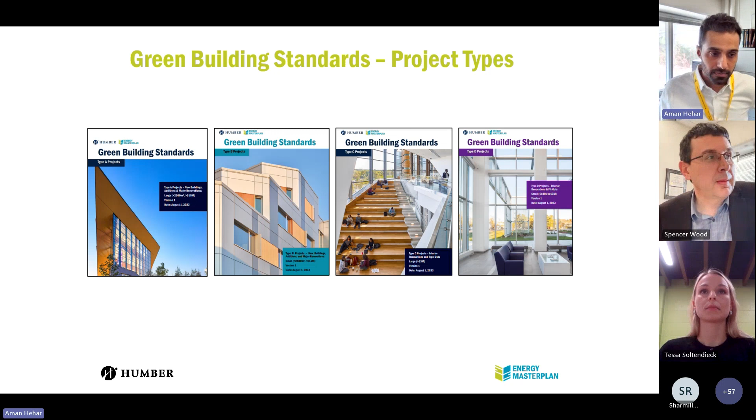Yeah, so I'll just give a quick overview. So the standards are divided up into 4 distinct documents. You can see the cover pages here on the slide. And each is for a different type of project. So we've got 4 project types. Like I said, the type A's are the new builds, additions, and major renovations, but the large ones, right? Bigger than typically 2,500 square meters, 15 million dollars.

Type B, same type of buildings or projects, new builds, additions, and major renovations, but much smaller. With type C, we're getting into the interior renovations and fit outs. But typically these would be the larger ones, over 3 million in capital budget. And then type D are our simplest projects, again, interior renovations and fit outs, but typically between 100K and $3 million.

As you might imagine, the green building requirements are the most onerous for the type A projects. These are our biggest projects. They have the longest schedules, largest budgets. So there's an opportunity to be more sophisticated in our requirements there. And if we contrast that with the type D, for example, here the green building requirements are very limited, right? But in our minds, that's okay, because these projects also have the smallest impact in the grand scheme of things.

Yeah, I'll pass it back over to you, Tessa, for the next question. Yeah, sure. So we've had a lot of interest in the green building standards for new builds specifically. Can you do a deeper dive into type A projects?

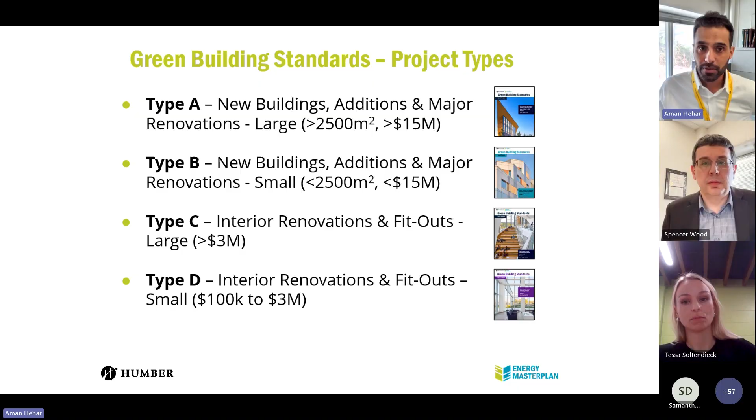Yeah, of course. I'm just gonna stop sharing the slide here and share my screen. So bear with me for a second. Can you see my screen? Yeah. Great. Okay.

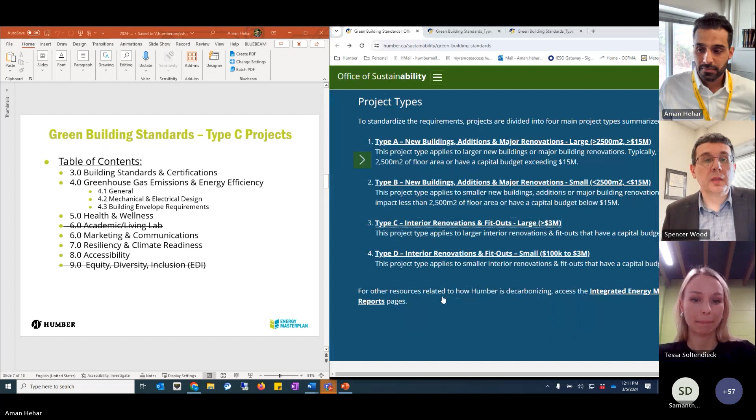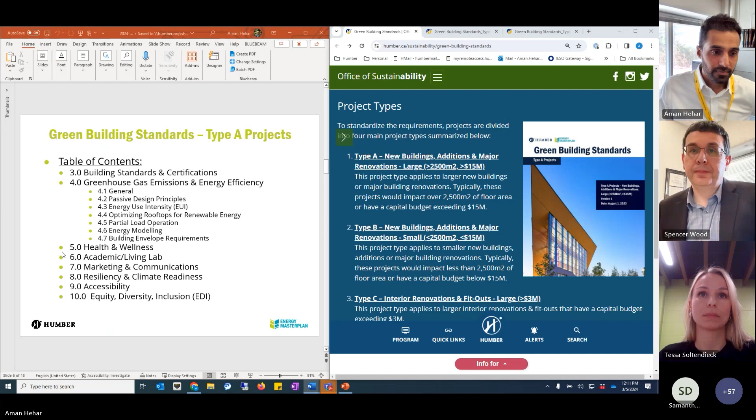So, I understand why there's so much interest in the type A. These are the biggest projects, biggest impact. I'll try to do a bit of a deeper dive into the type A's. The standard is quite long, and there's a lot of detail in there. So I'll try to make this as interesting as I can.

So what I have here is the table of contents from the type A standard on the left on the slide. And then on the right, I have the actual PDF document for the green building standard. And I'm just going to go through some of the major sections and scroll through the standard as I do it. So hopefully that's easier to follow along.

So I want to start with this building standards and certification section. We've mandated LEED Platinum certification for all of the type A projects, and also zero carbon building standard certification. There's a lot of text here, which I'm not necessarily going to cover, but like Spencer said, through our experience, in some cases there are certain credits we want the teams to pursue, or certain options within the standards we would like them to pursue. And so that's detailed in here.

I'd say in general, 70% of what you need is probably covered by just pursuing the standards, and everything else in this document is complementing what's in these standards or enhancing it where we felt it was appropriate. So moving on to the first major section afterwards, it's the greenhouse gas emissions and energy efficiency. A few things I wanted to highlight here.

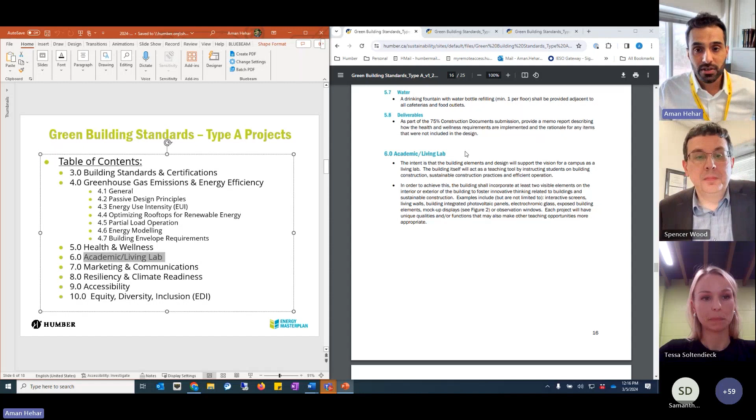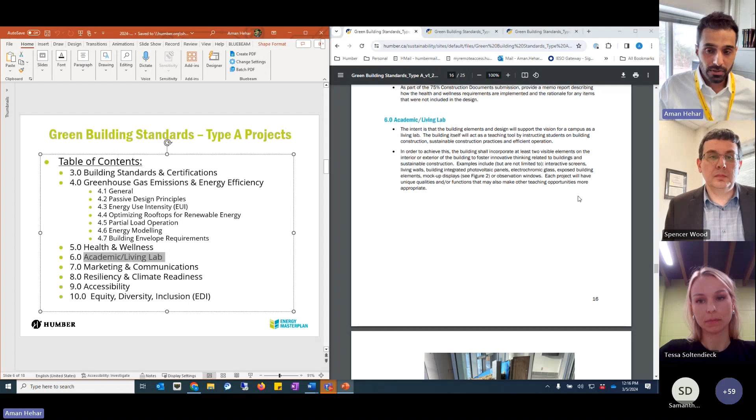Then moving along, we've got this academic and living lab section. So, a lot of these projects, the sustainability features are invisible, right? They're behind walls, they're in mechanical rooms. So the idea here was we wanted all the projects to have some visible sustainability elements and also some signage associated with that so people could learn. So this section essentially requires projects to have 2 visible sustainability elements at a minimum as part of the project.

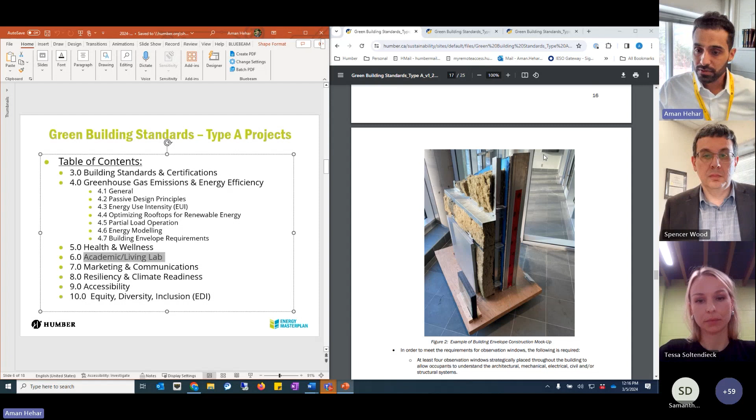There's an example here of a mock-up we did for a building envelope, which has been really, really helpful when we give tours. It's things like this that we're looking for. But it's a bit flexible. Essentially, we've asked for a charrette as part of design, and we'd work together with the project team to figure out what makes the most sense for the project.

Okay, moving along, there's a marketing and comms section. We're essentially asking teams to submit a data sheet for the project, explaining all the features, so we have a starting point to develop marketing material around.

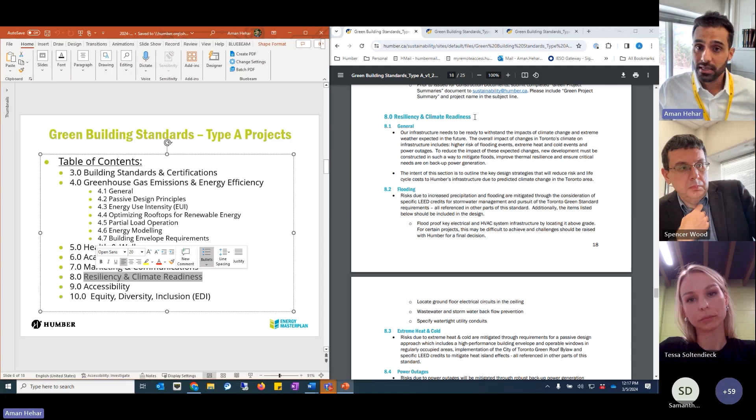And then getting close to the end here, there's a resiliency section. So, we did a bit of research in Toronto specifically. The main areas of focus seem to be higher risks due to flooding, extreme heat and cold events, and power outages as a result of a changing climate. And so there's text around each of those core areas in here about what we want the design teams to achieve. And frankly, I think this is an area that's going to evolve over time as we also learn more about what it takes to make a building resilient, and as we get experience operating buildings and having climate change in front of our eyes.

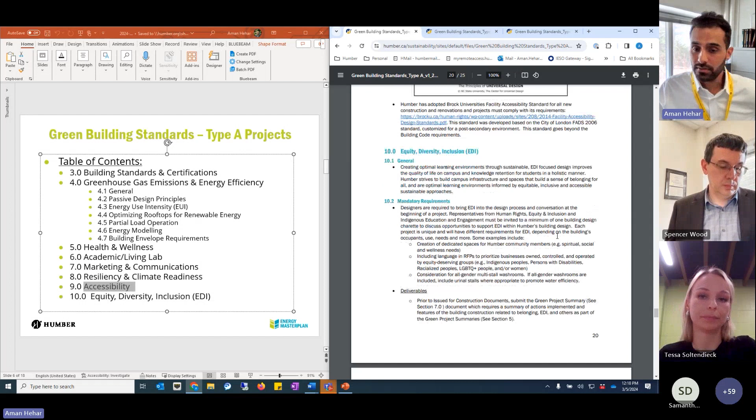Last couple of sections here, we've got accessibility, with reference to a standard we like, and then an EDI section, equity, diversity, inclusion. Essentially, we've asked for a charrette here with our EDI department, looking to spur some ideas on how we can make the building more equitable and inclusive. Okay, I'll stop there. That basically takes us to the end of the standard. We can get into more details during the Q&A.

Okay, yeah. And I'll also mention I see some folks putting questions in the chat, and we will get to those during the Q&A. So that was really useful. Thanks, Aman. And I'm wondering if it might also be helpful for folks if we were to contrast type A with smaller projects like type C, and if you wouldn't mind going into a deeper dive about type C project requirements.

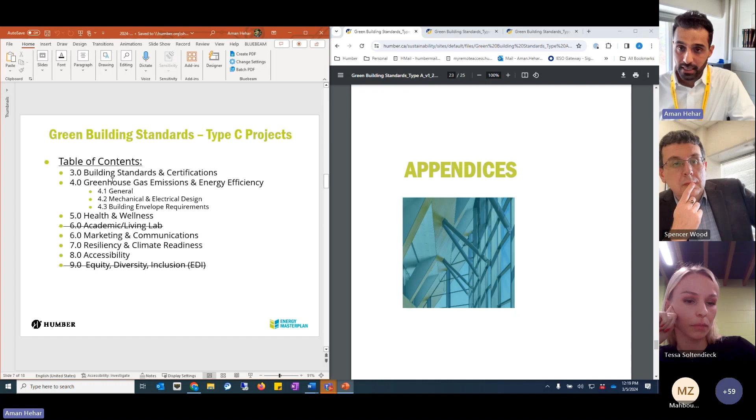Yep, no problem at all. So I'll do it similar to how I did type A. I've got the table of contents from type C on the left here on the slide, and I'll just pull up the type C standard. There's a lot of overlap between A and C, so it's going to go much faster this time. But hopefully the first thing you notice is the size of the document. It's only 17 pages versus 25, and that speaks to the comment earlier about the requirements being less onerous for smaller projects.

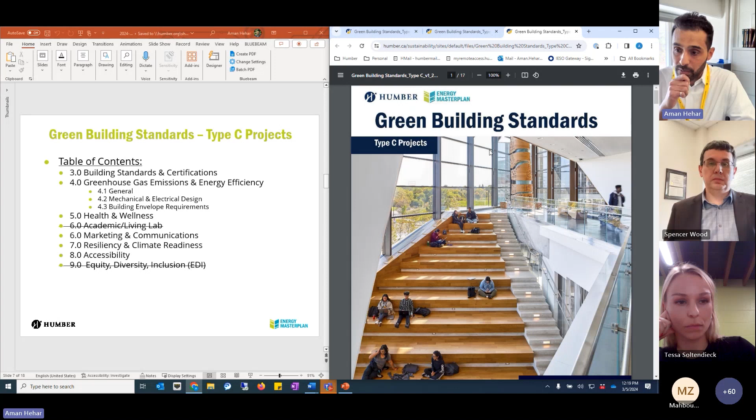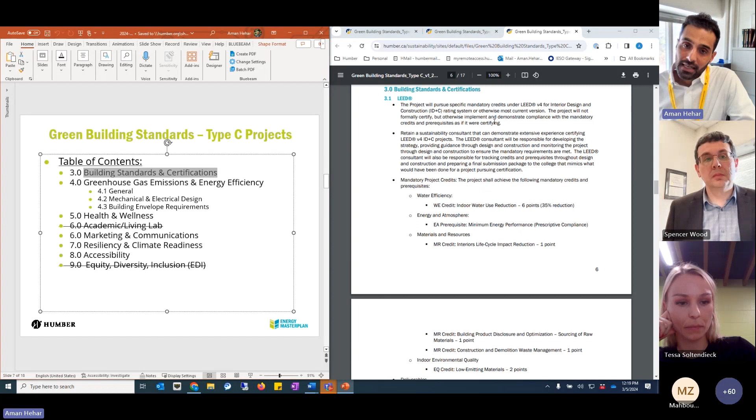So I'll start with the same building standards and certifications section. LEED does have a rating system for interior design and construction. We didn't mandate certification under that standard. What we did instead is we went through it and, again, cherry picked specific credits that we really liked and thought were valuable to us. And so we've mandated those.

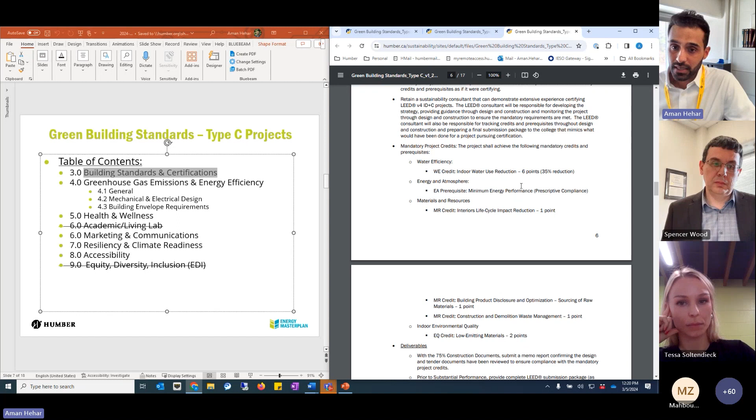And what we've asked for is the team to carry a sustainability consultant, and their role would be to essentially act as if the project was going to be certified, provide input on design, and during construction, collect all the documentation, work with the contractor to make sure they understand what's required, and then put a package together as if they were certifying and submit it to Humber. And that way, we have assurances that the stuff that we want is actually getting done.

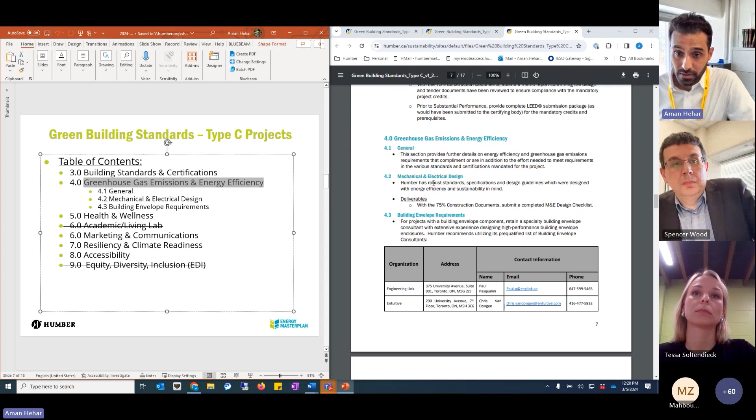Moving on to greenhouse gas emissions and energy efficiency, you'll notice this section is much smaller this time. We've essentially just said we've got some really robust mechanical and electrical standards and specifications, and we'd like the team to comply with those.

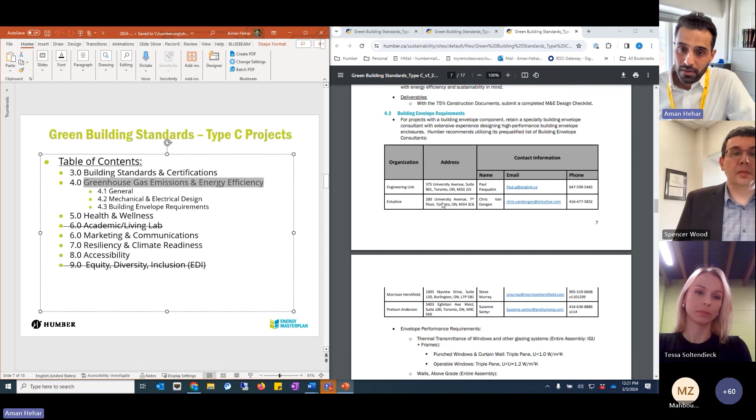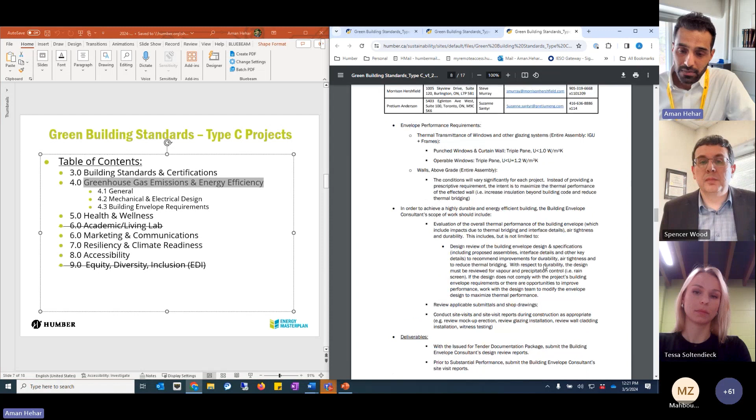On the building envelope side, in most cases there will not be envelope work as part of the interior renovations, but when there is, we've provided our consultant information again, along with some prescriptive requirements for the envelope and some really basic scope for the envelope consultant to carry out.

On the type A, we had an academic living lab section. We took it out for the type C, again just trying to keep things simple for the smaller projects.

We also have this health and wellness section. It's very similar to the type A, so I won't go through it in detail. It's just been stripped down to only the things that apply to a renovation.

Marketing comms is exactly the same as type A. And for resiliency and climate readiness, again it's very similar to type A. We've just stripped out the things that don't apply to an interior renovation.

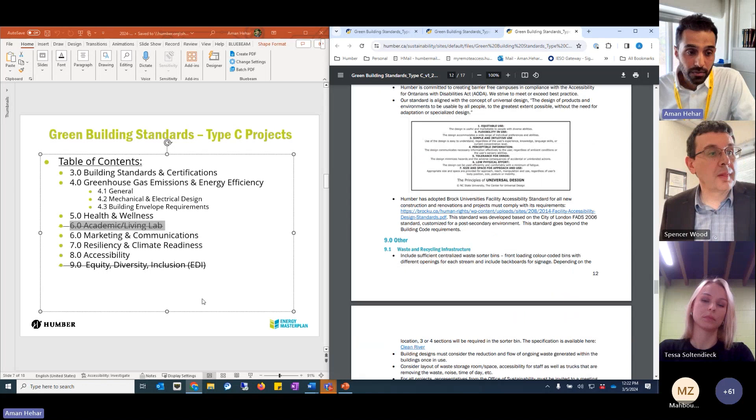Same accessibility requirements, and then we've removed the EDI section—again just trying to keep it simple for smaller projects where they have less potential to make an impact in this area.

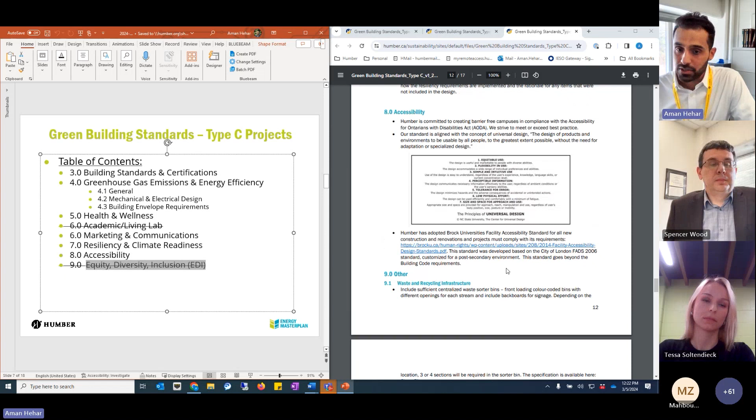Okay, I'll just stop there, Tessa. I'll send it back your way.

Great, thanks for the comparison. I know that when we released the standards, we got a lot of really great feedback that they looked great and were really ambitious. But we had a lot of questions too, with people expressing that they've struggled to get similar initiatives approved at their own institutions.

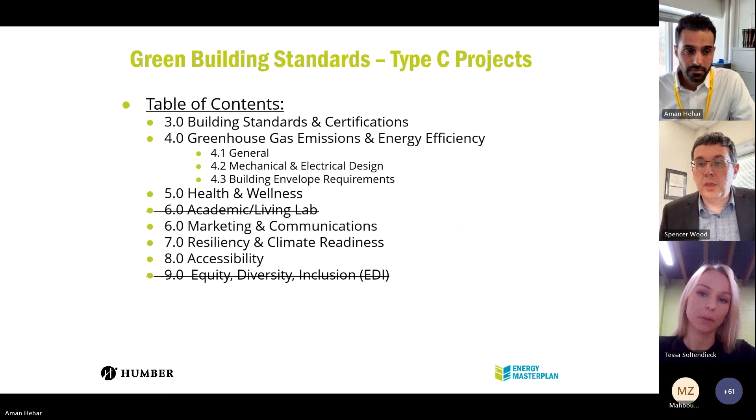So can we talk about how our team got these approved and moved them down the chain? Yeah, absolutely. The latest question in the chat from David is: do you have trouble enforcing your standards once budget or construction timeline pressures come in? The answer is no—it's probably been four years since I've had to fight for sustainability features in a project.

And I'll tell you why and how we've done that in this next piece. So in 2015, Humber embarked on a process we called the IEMP, the Integrated Energy Master Plan. You want to go to the next slide, Aman? There we go—it took us a year to go through that planning process.

You might say that's an awful lot of time to put into something that by itself doesn't save any energy or reduce any carbon, but this has been the key to buy-in for the entire program.

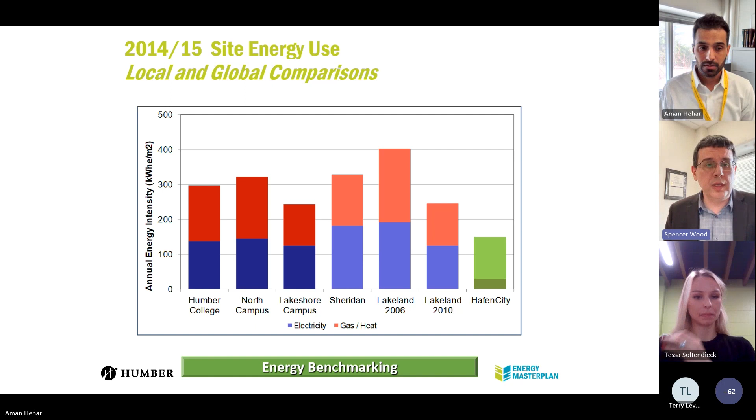So these are pretty aggressive targets, because we weren't that bad to begin with, frankly. 50% reduction per square foot of energy.

That's the one that's driving a lot of this. Water also 50% per student in this case. Carbon has been tricky because it's a 30% reduction, but it's an absolute reduction. We have a financial return, and we also have an academic goal where we're trying to get into the curriculum as well.

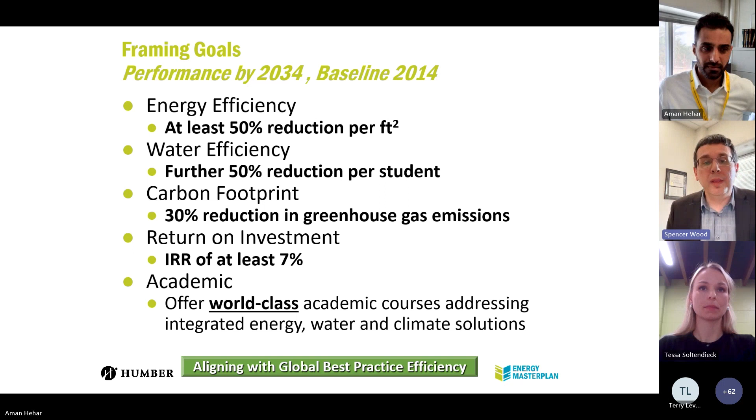So that's what everybody in the institution has agreed to. And then we went to work on our projects.

So why this has worked for driving these standards is we got this broad stakeholder participation, buy-in, and we've been fortunate in that institutional knowledge is still here today, 8 years later. Everybody gets it, why we're doing it and what we're doing and why.

We also went through this process. We only sold it once, so I don't have to do a business case for every single project. I don't have to do it for the sustainability or energy features in every project. We sold this once. We said, this is the payback, this is why we should do it. That saves an awful lot of time doing it every time, but there's no possibility of it being denied at any point. Everybody knows this is just how we do it.

We also blended the payback. So this is more on the retrofit side, but we got a multi-year commitment to dollars for retrofit work, and that money is in the capital plan, and we're just pulling against it. So we know how much money we have, and we know when it's coming.

We believe that this is the only way to get to savings like a 50% reduction in energy use. Otherwise, if you're just doing incremental pieces, your number won't move, and that's probably where we were before we started this. I'm going to guess that most people are in that boat today. You do projects, excellent projects, but does your number move? Not much, right? Our number has moved a lot.

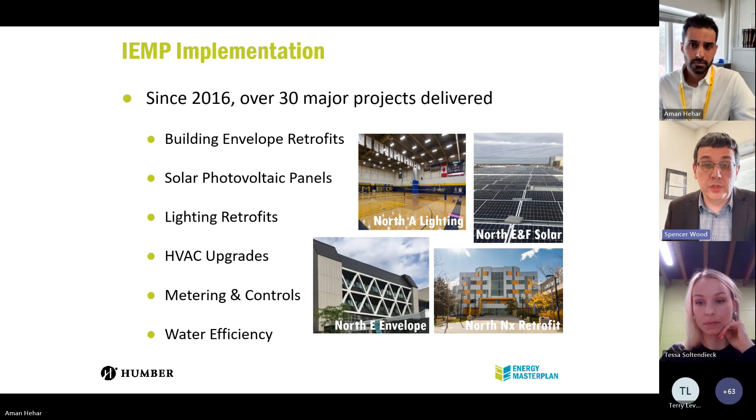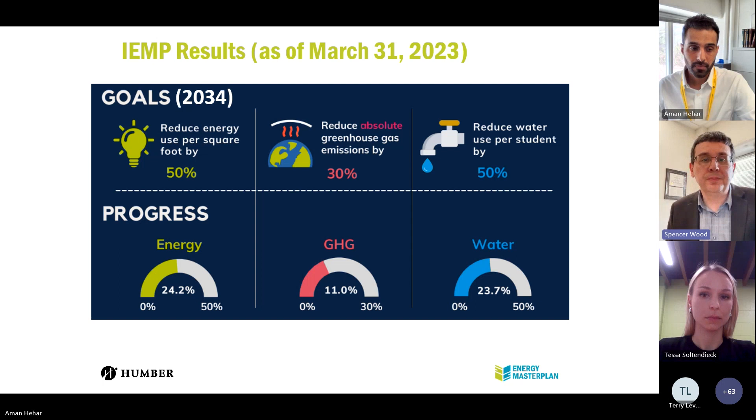Okay, is that the last one, Aman? Yeah, that's the last slide. Okay, so that's the end to my answer for this one, and I will back to you, Tessa.

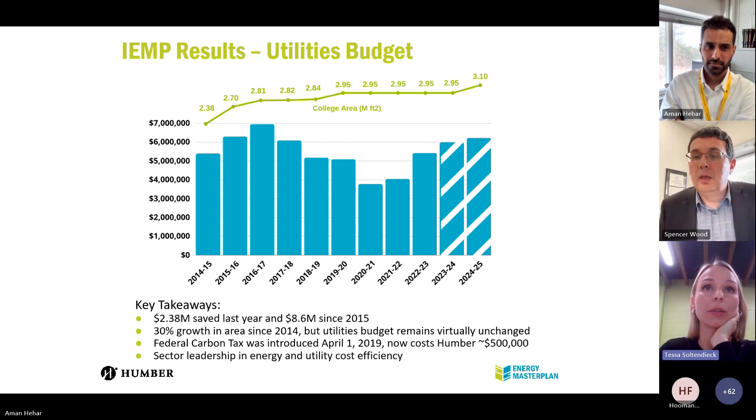This one is from Norm. City of Toronto Green Building Standards, LEED, passive house - thoughts on spreading standards too broad versus being more prescriptive towards one key standard?

I can take that one on. Toronto Green Standards are mandatory in Toronto anyway, so there's not much in the standard around that. It's basically you got to do it, and they know they have to do it in Toronto.

Beyond that, we use LEED and zero carbon building certification - they're kind of different animals, so we felt we needed to have both in the standard. The zero carbon building standard is big on energy efficiency and operating carbon, embodied carbon in the construction. LEED is kind of everything else related to sustainability, all the other things you need if you want a sustainable building, but aren't necessarily related to energy efficiency. So that's why we went with those two.

I see passive house listed here as well. We've done one passive house building, but in our minds those are more like showcase projects. It would be tough to do that on every project, given the complexity and the cost.